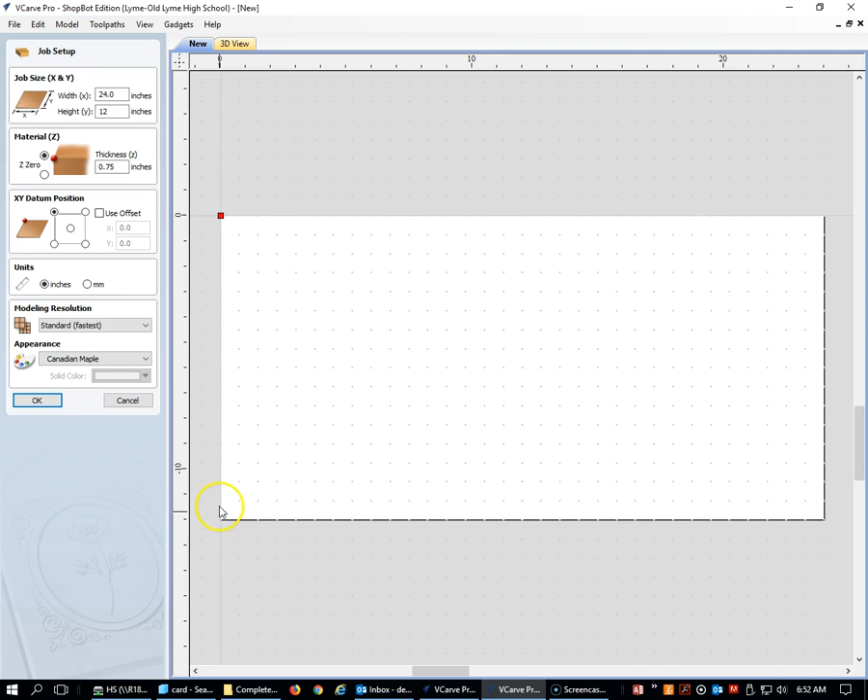It's 24 inches wide by 12 inches tall. Material thickness in this case doesn't really matter because we're not going directly to that, but we'll just leave the default. The XY datum position, just so you're thinking about it, for the laser cutter it's in the upper left-hand corner. On the ShopBot, we usually put the datum in the lower left-hand corner. So depending on which machine you're going to, you'd want to make note of that. For the laser cutter, I put it up there.

Hit OK. Remember that this white rectangle represents the entire area of the laser cutter. We are not going to be using all of that for this part that we're making, so we're probably going to be zooming into the upper left hand corner.

Under edit, we're going to go down to where it says snap options. This allows us to set up a grid to make it easier if we were doing a simple drawing, so we don't necessarily have to measure everything. So I'm going to set it to snap to the grid, and set my grid spacing at 1/4 of an inch. So I hit OK.

Okay, we're ready to start drawing our claw. I'm going to grab this tool right here, the Polyline tool, and I'm going to start drawing. Notice there's a ruler on the side here, so this represents 2 inches. We can also enter values for our line as we draw them - it's telling me over here what the length and angles are as I draw. So I'm going to draw something to represent some of the hooks that you might be making.

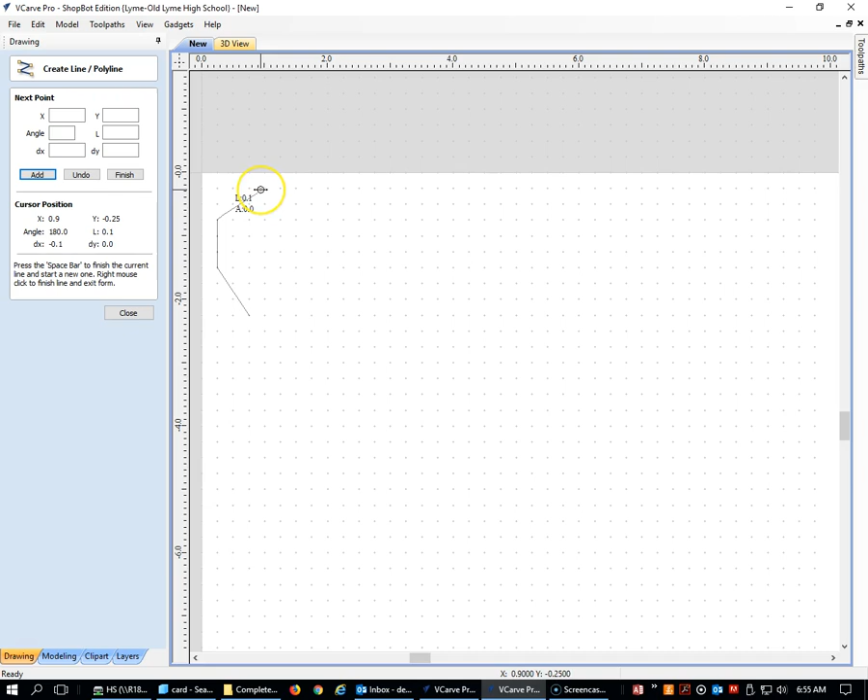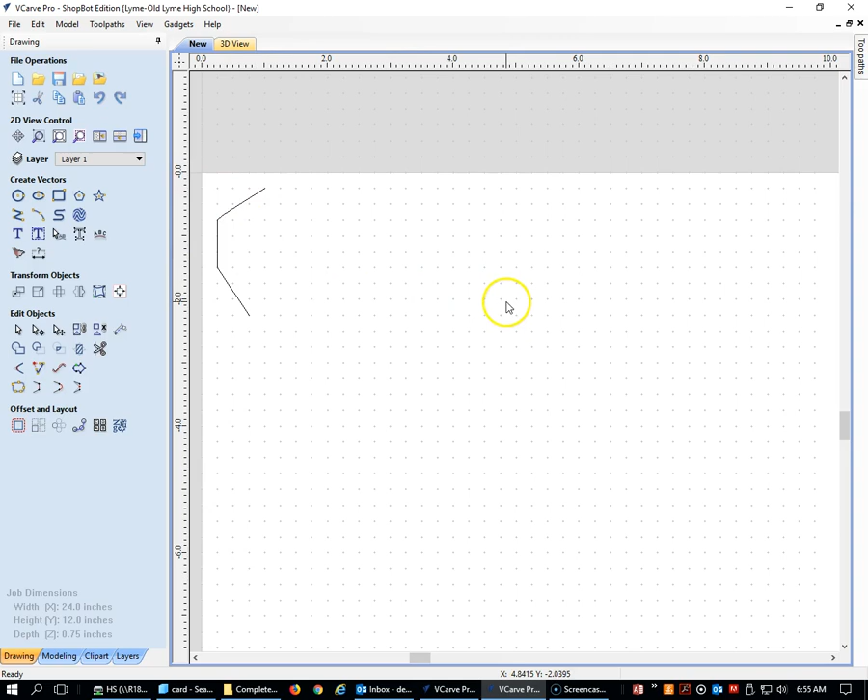Okay, I only drew one line. We need some thickness to this. There's a couple ways for me to do that - I could continue drawing with my Polyline tool, or there's a tool down here where you can offset an existing line. So mine is highlighted - if I click over here, it's no longer highlighted. If I come back and highlight it again, I could go offset.

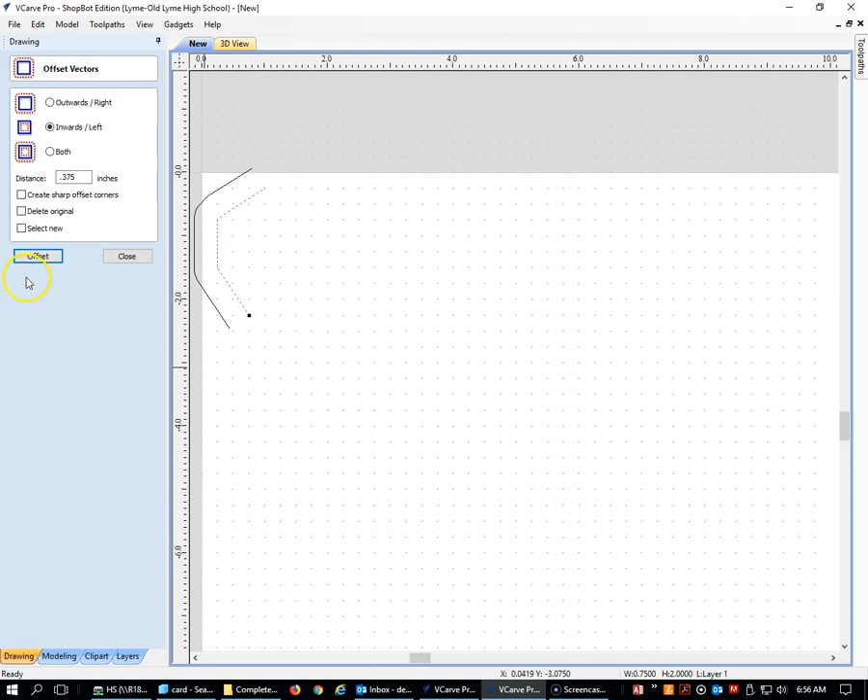Let's say I want to go inwards, and I want my claw to have a thickness of 3/8 of an inch. So I could type in 0.375 and hit OK. Oops, I did that the wrong way - I guess that interprets it differently than I expected. So I just offset it the opposite direction. Close that, no big deal.

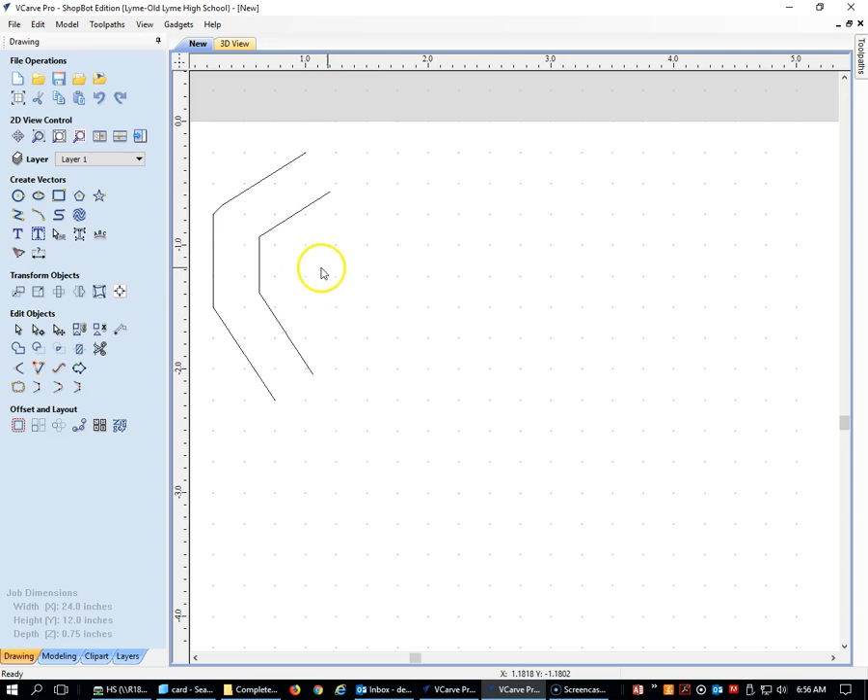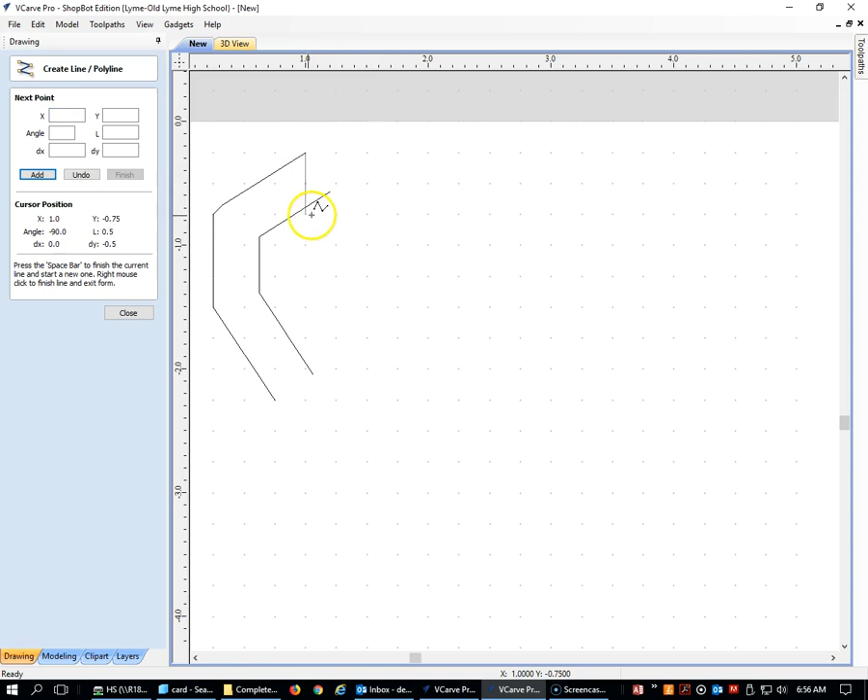I'll take this one and delete it. And now I have this set of lines that are a set distance away, and I'm going to go ahead and modify my claw a little bit. I'm going to grab my Polyline tool. Notice that as I hover my mouse over the end, it changes from one center mark to a square with a center mark that tells me it's going to click right on the end of that line. Then I'm just going to draw a straight line down like this and hit OK, and come over here, grab that tool again, click right on the end of that and right onto the end of that.

Now you can see I've got a little extra here, and I don't want that, so I've got a pair of scissors over here. I'm going to come in and just trim those out.

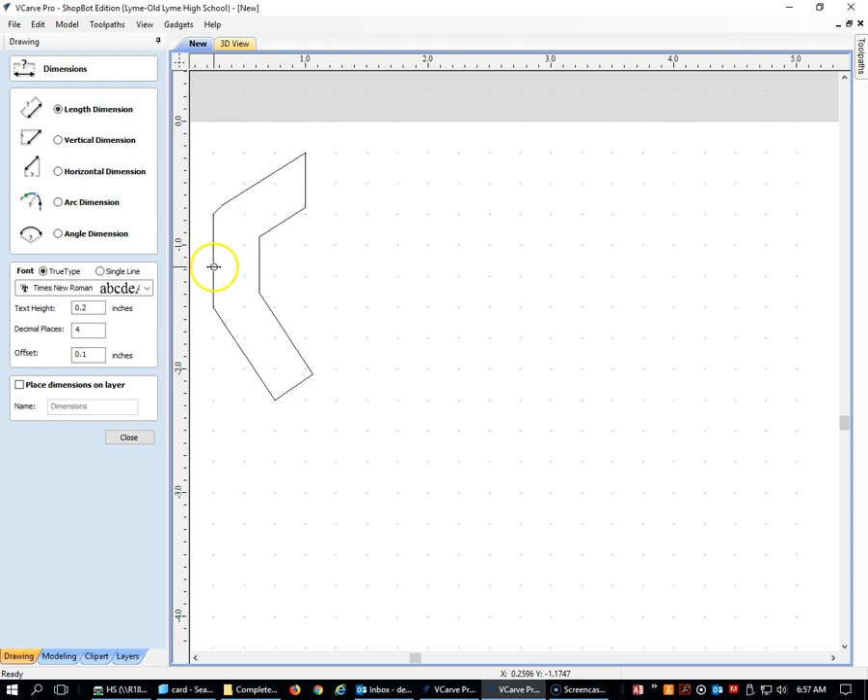There's also some other tools in here that are helpful. There's a measurement tool if we wanted to figure out how far it was, if we didn't remember what our offset was. I can just click on here and click over to here and ask what's that distance - oh, that's 3/8 of an inch, or close to it. I didn't snap my ruler in exactly the right spot. I'm going to undo so that's not sitting there, so we can get some measurements on there.

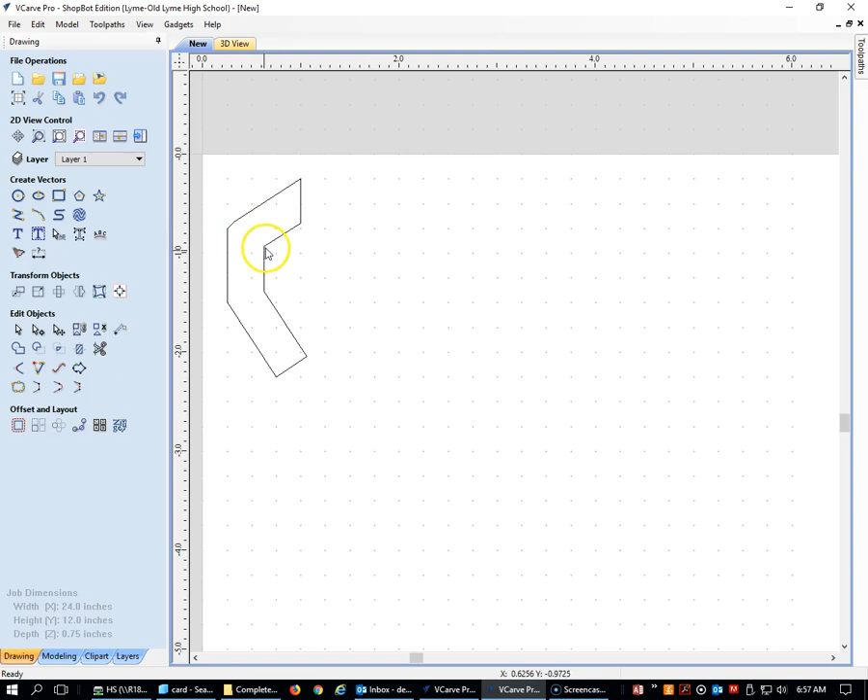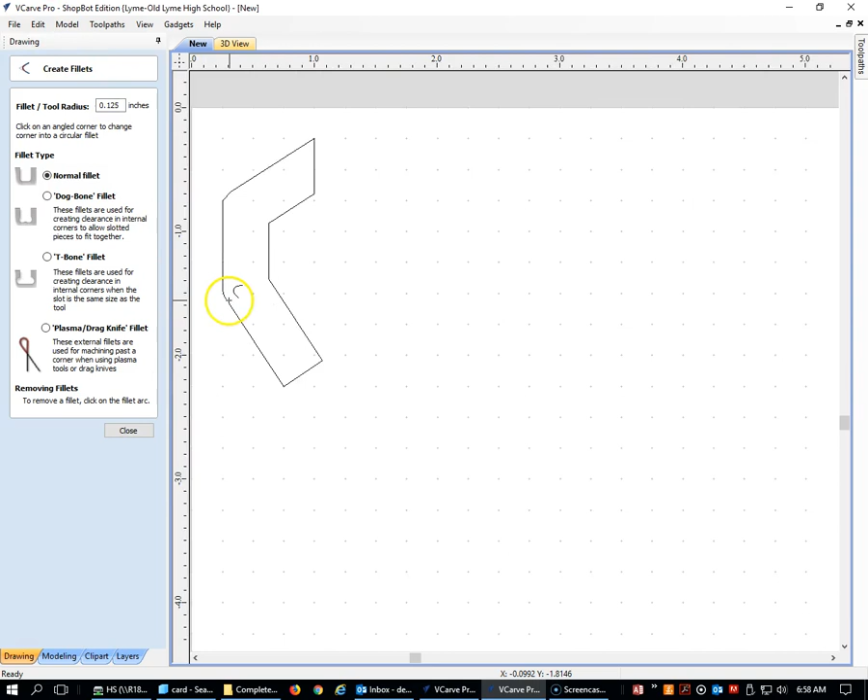It's also a nice tool for adding little rounded edges. Fillets tend to add a lot of strength, so I usually use them, and to take the sharp points away so you don't cut yourself. So I'm going to go over here and create some fillets. We can set the radius of our fillet - I'm going to leave mine at 1/8 of an inch. And as I hover over those corners, you'll see that I'm going to get a little bit of a rounding going on. Maybe not - what's going on here?

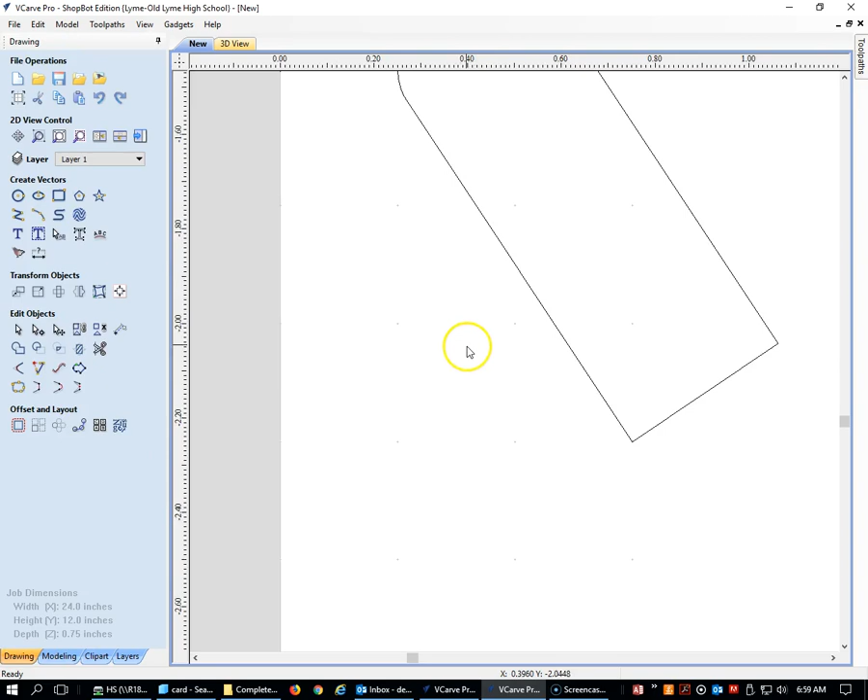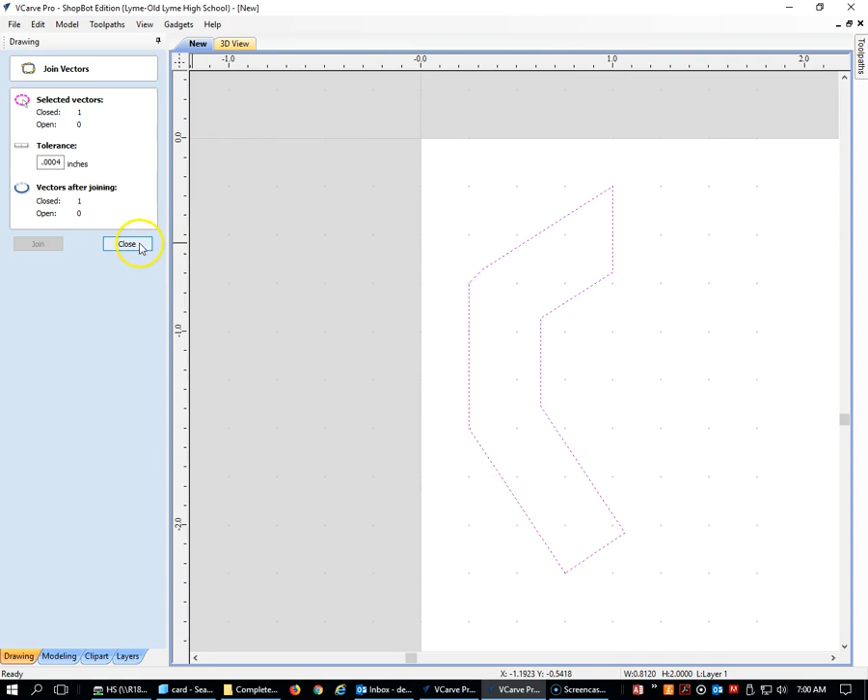Okay, I think I figured out why that fillet tool was only working on these lines and not these lines. So we're going to show you a little trick that's important. If I click on these segments, notice that this segment is not joined to this segment. So I'm going to go ahead and select the whole thing, go over here and hit join to make sure that all of those items are one. Now when I click on the line, the whole thing is joined, and I have a feeling if I go back and use my fillet tool now, things will act, yeah, there we go.

That looks a little better. Come in and round things up a little bit. All right, that's looking good.

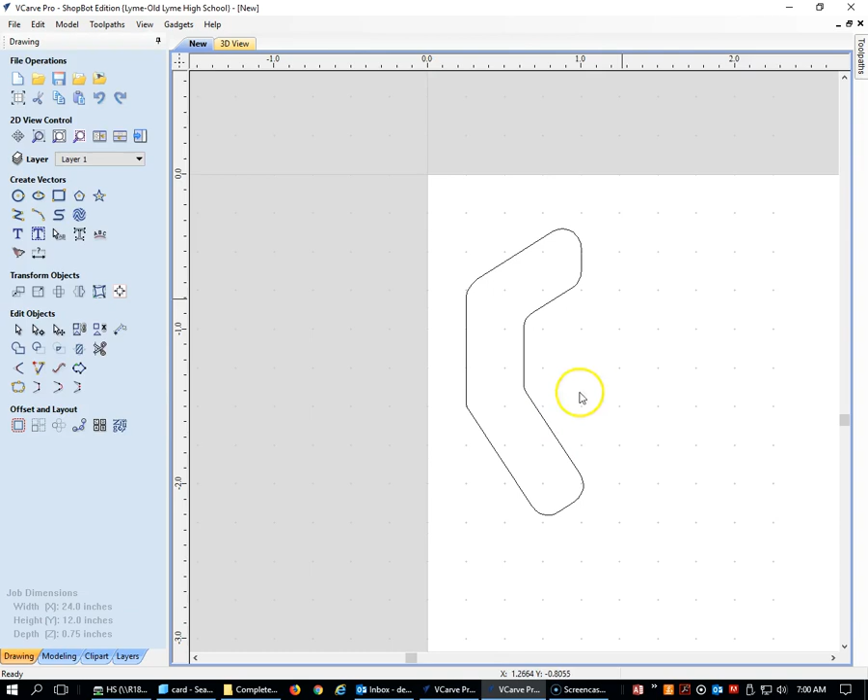Now, for the intro class, guys that are making these claws, they might be attaching them to Lego parts. So I'm going to go ahead and draw some holes that will allow us to attach them to our Legos. So I'm going to draw a hole here.

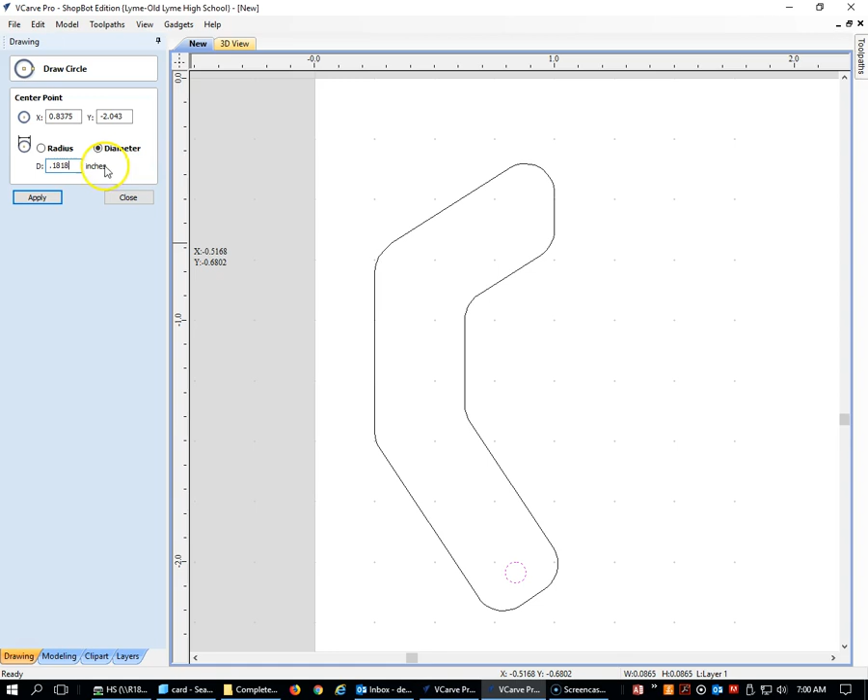The size of the hole is really critical, and we can enter that right here. Make sure you have diameter selected, and the hole size, if we're cutting into Luan, turns out to be a perfect fit if we type in 0.1818. And if we hit apply, that'll make that hole the right size.

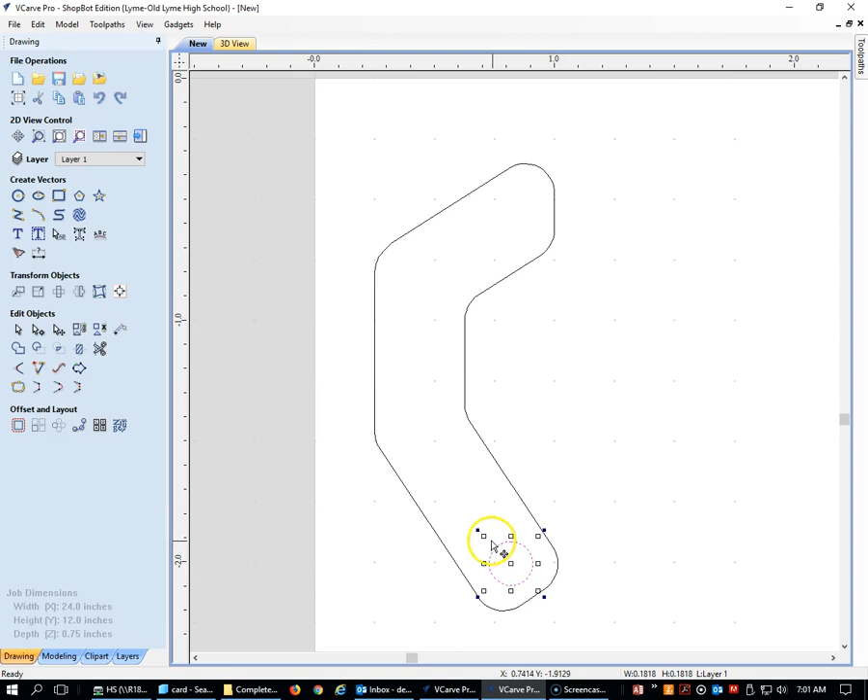So now I can come down here and I can move that hole around a little bit if I want to. And I've got a spot. Maybe I can move it in a little bit further. The move tool is actually this guy right here. And we can move it so it looks centered.

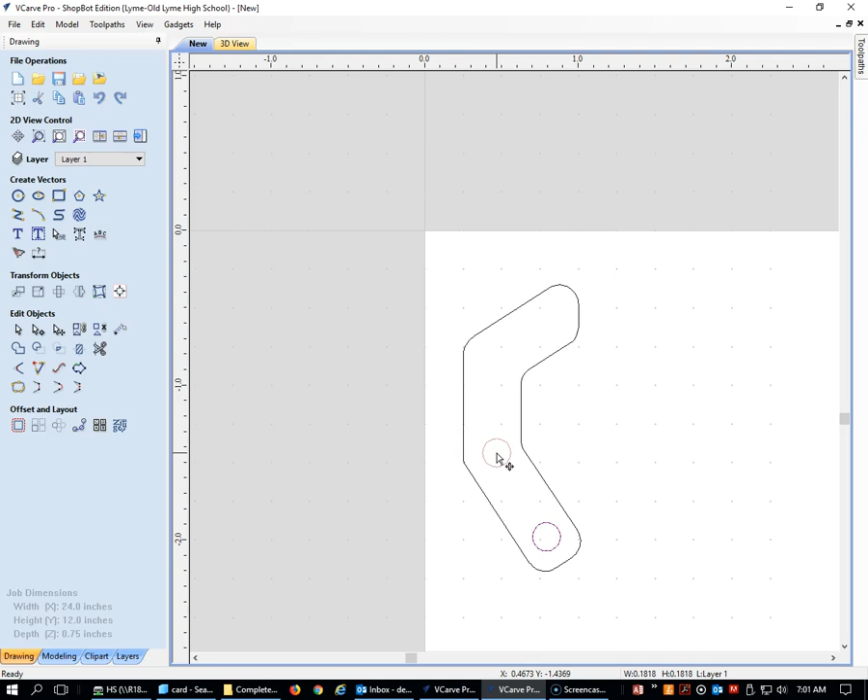Maybe I need another linkage out here to operate my claw, so maybe I could just take that hole and I can just Control C, Control V for paste. Now I have two of them. I can put it over here, or I could just draw another hole if I wanted to. Don't know if I need that or not.

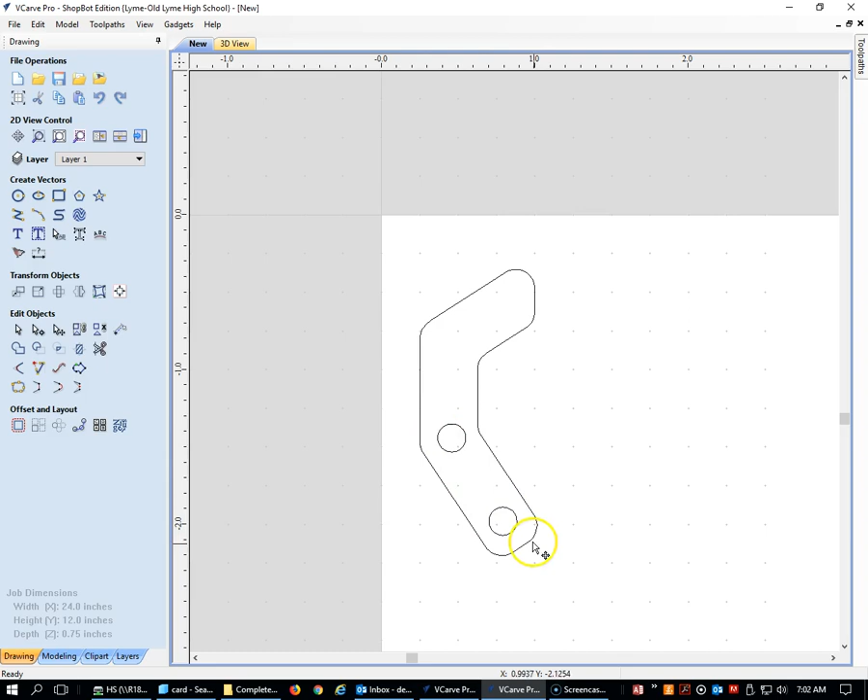If you are doing a series of Lego pieces and you needed to get them to be exactly the right distance apart for multiple Legos, let me show you how you would do that. So let me do that instead. I'm going to delete that hole. I'm going to select this hole, and I am going to use my linear array.

I've got this circle selected and I hit my linear array, and I'm going to change the number of rows to 3 and the columns leaving at 1. Columns are going to create it this way. Rows are the horizontal. Make sure you're set to offset, and the gap, the offset is just going to be in the Y direction because we're creating rows and it's only one column. In here, I'm going to type in

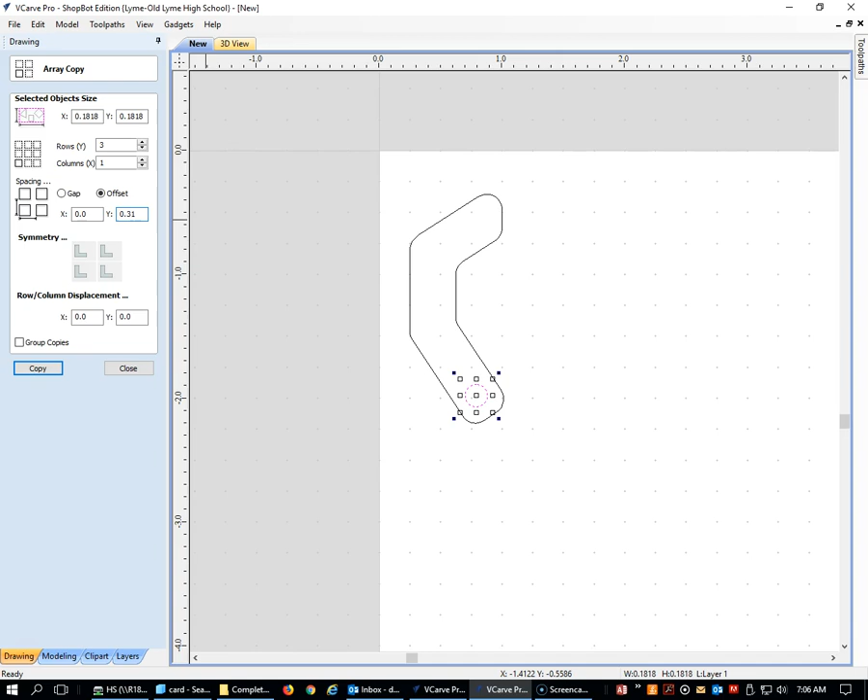0.314961. I think it's going to round that. No, it didn't. I hit enter, and I've got my 3. I'm going to close this out.

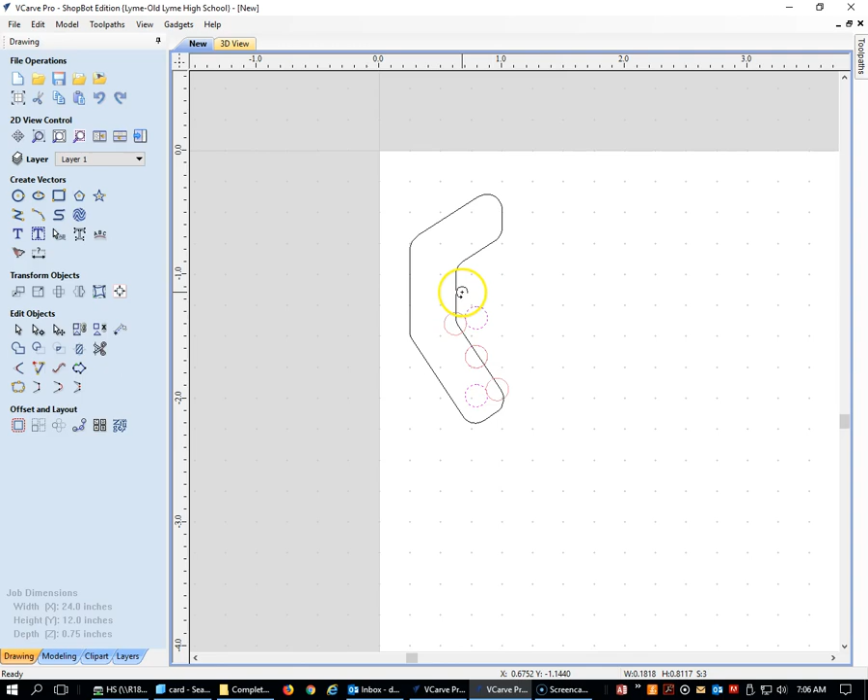Now, it's important that we don't move these because this is the space that is exactly the distance between the Lego pieces. So I'm going to just select these, they're already selected. I'm going to come over here to my move and rotate, and now I'm going to come out here and I can take this whole set and rotate it. Haven't changed the spacing at all, and I can pull them in here. So now I've just created 3 holes that are perfectly spaced for Legos for my arm if I wanted to use that. Go ahead and select this whole thing.

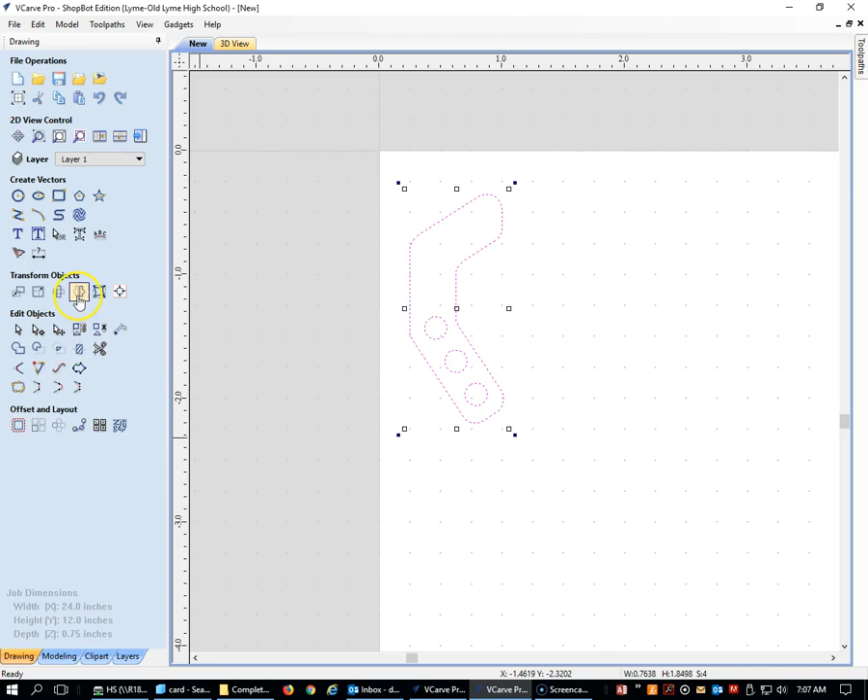Maybe I want another copy. So there's several ways to do that. I could just copy it. Or I could use the mirror tool just to show you what that looks like. And there's several ways to mirror it. I could create a mirrored copy and keep the existing one by going right like that. That's an easy way to do it.

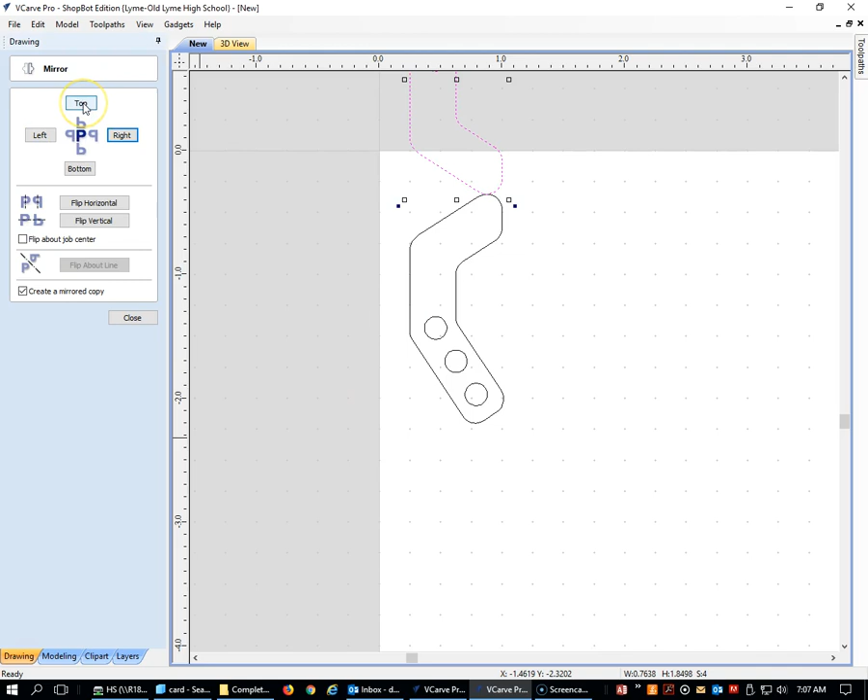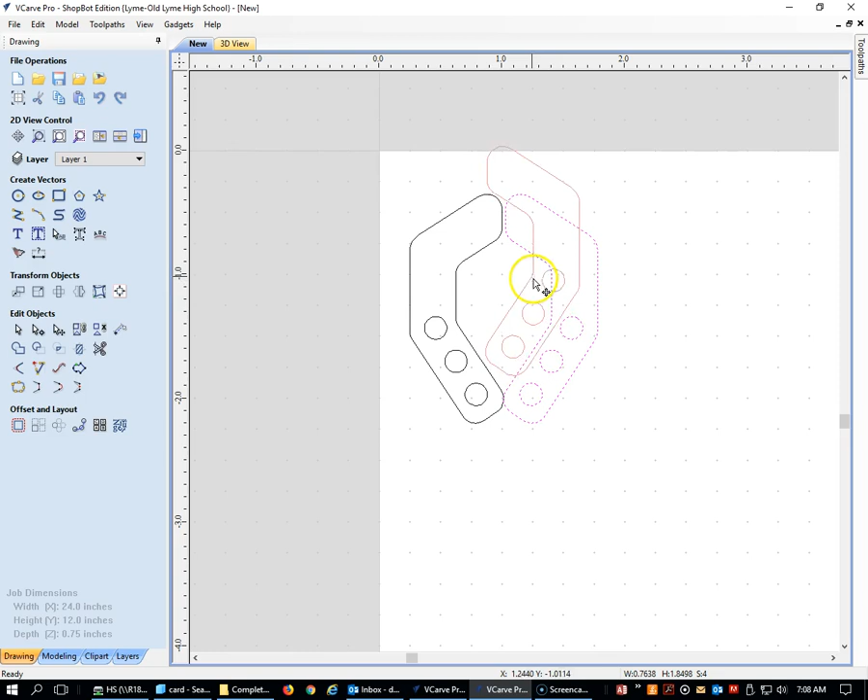I could also go left, or go up, or go down. Doesn't really matter. I'm going to go right here. And if this material, well, obviously it's a laser so it can cut close, but if we wanted to conserve material, which is always a good idea, I'm going to select all of this, make sure I select the whole thing because we don't want to move them independently, and maybe I want to start to nest these things together so I don't waste as much material, and then I can move the whole thing down a little bit.

Okay, maybe I have another piece for my part that's kind of a U-shaped piece that's going to allow my linkages to create. There's any number of pieces that you can draw. We can cut them out of a bunch of different materials. I don't think, I think this video's run a little bit long already, so I'm going to wrap it

up with a couple more steps. First off, I'm going to hit save. I would definitely save this to my folder. And in my case, I think my folder is on my C drive. Maybe not. Under users, dairy, I don't have a folder. There, I have my video production folder.

I'm going to go to new IT, and in my IT folder, we should have an ROV project. I believe you already have that. So I'm going to save this as my ARM. Now we've got one more step after this, because this is a

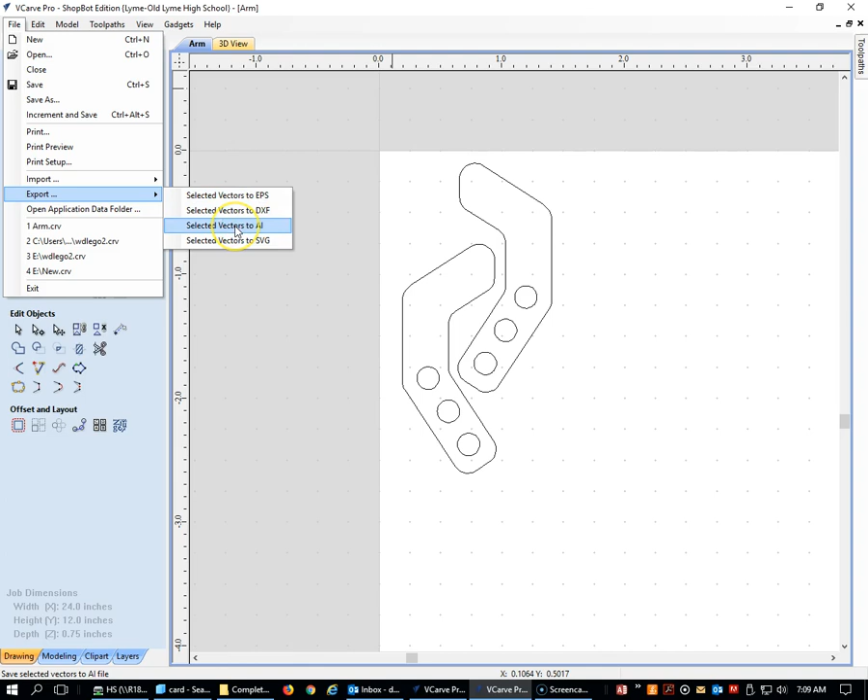vcarve file and our laser cutter likes Illustrator files. So I'm going to go to File, Export. This is kind of like saving a toolpath. I'm going to select selected vectors to AI for Adobe Illustrator. Well, I need to select my vectors first.

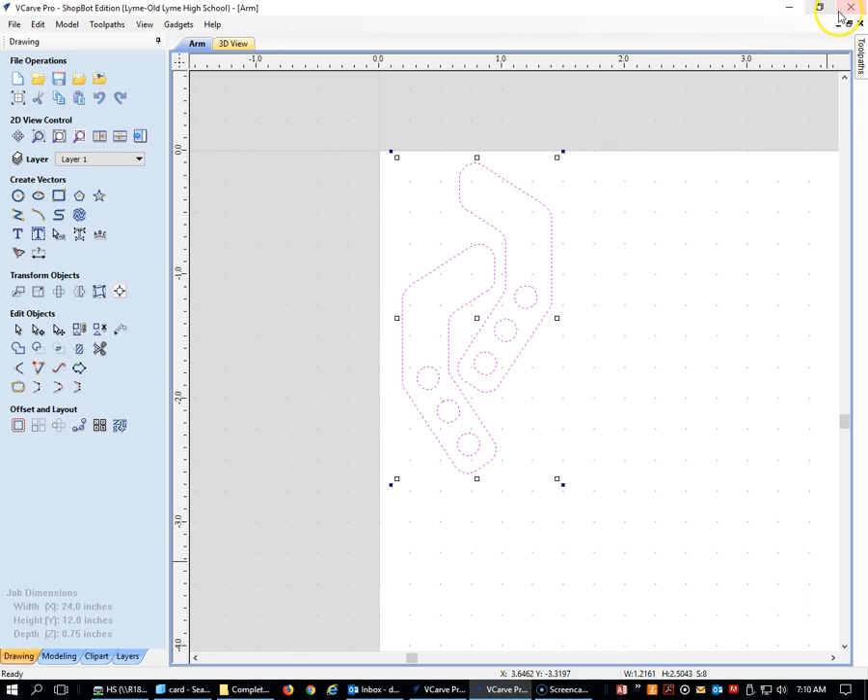Then I need to go to Export, and we're going to put it in my same folder, and I can call it, actually I'm going to call this one WD, because the laser printer it's good to have your initials in front of that. It's going to be our protocol. Hit save. We're going to put this file, both files actually, on a flash drive and bring them over there, and we should be able to cut them out.